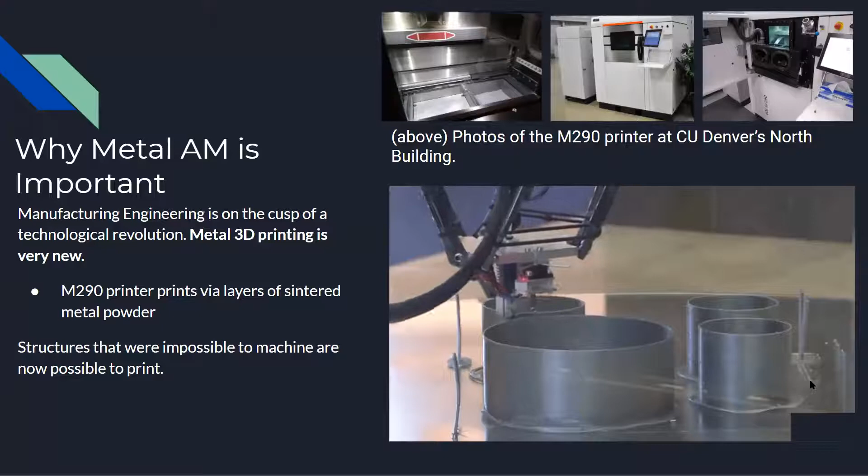Our project had three main goals. Our first goal was to design a part using additive manufacturing techniques, which can then be compared to a conventionally manufactured part. Our second goal was to perform material testing. Of particular interest was fatigue testing on coupons which have not been surface finished. Our third goal was to develop a method to detect errors which occur during the recoating phase of printing.

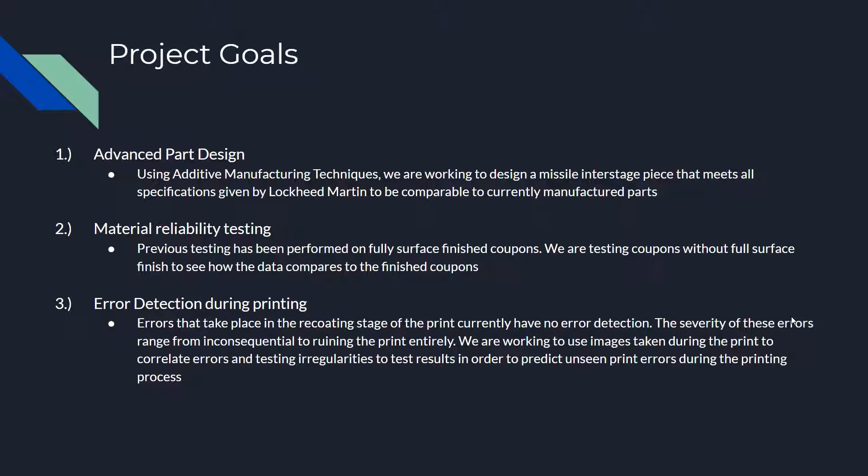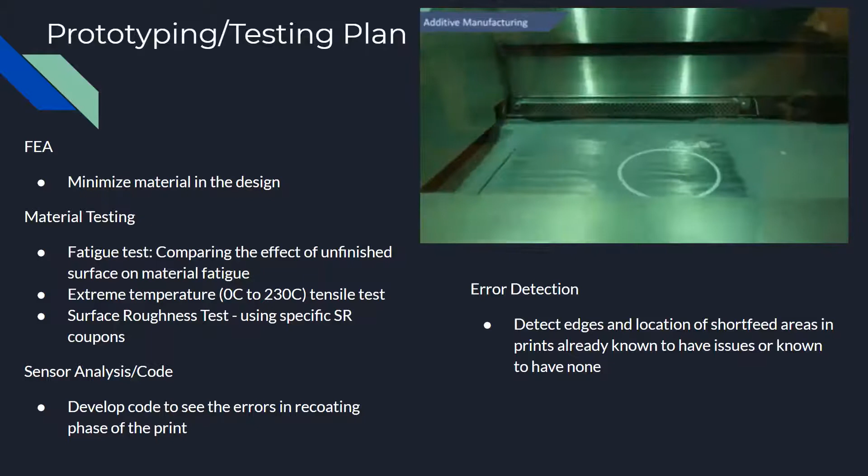Next slide, please. For prototyping, we utilized finite element analysis to minimize the amount of material in the design. For testing, we tested fatigue strength of unfinished coupons, tensile strength at high and low temperatures, and surface roughness. We also developed code to detect errors in the recoating phase of the print. Next slide, please. So, material testing. Next slide.

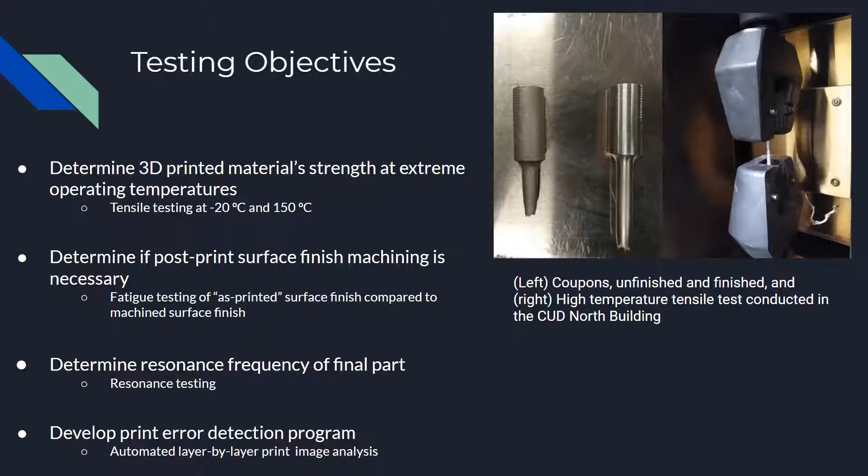So given our design requirements, we determined that we had four main testing objectives. One, to determine if the 3D printed aluminum meets the strength requirements throughout the anticipated operating temperatures. Two, to determine if surface finish machining is necessary in order to preserve part integrity. Three, to determine the natural resonance frequency of the final part, whether it's greater than 20 Hertz. And finally, to develop an automated print error detection program to determine whether printed parts have any hidden errors without having to perform destructive testing. Next slide.

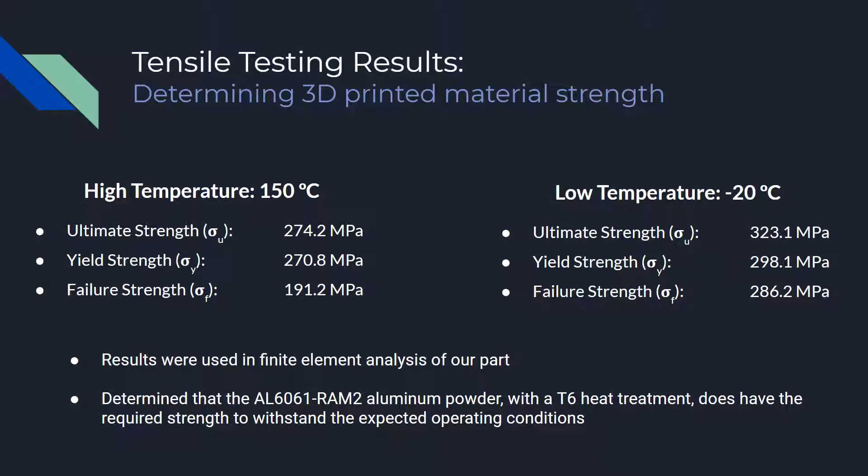We performed extensive tensile testing at 150 degrees Celsius and negative 20 degrees Celsius to simulate the potential environmental conditions these parts would be operating in. We did this in order to determine the ultimate strength, yield strength, and failure strength of the printed parts at these extreme temperatures. These results were then used in the finite element analysis of our part to determine if the parts themselves would withstand these extreme temperatures without failing. We were able to conclusively determine that the final iteration of our part will withstand the forces it will be exposed to over the wide range of environmental temperatures it's expected to operate in. Next slide.

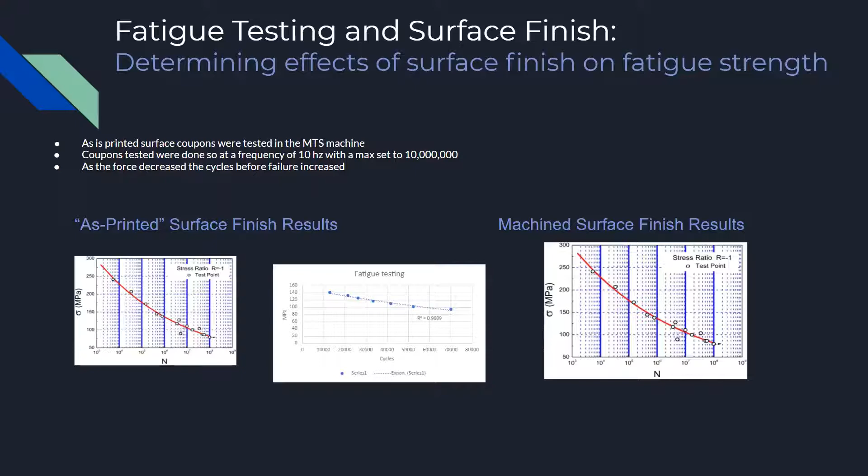As-printed surface coupons were tested on an MTS machine, and the frequency of the machine was set to 10 Hertz. In testing the aluminum 6061 coupons, tests showed that as the ultimate stress decreased, the cycles increased. Tests were decreased at a rate of 5% UTS per test, and results fell within a reasonable curve similar to non-3D printed manufactured aluminum. Next slide, please.

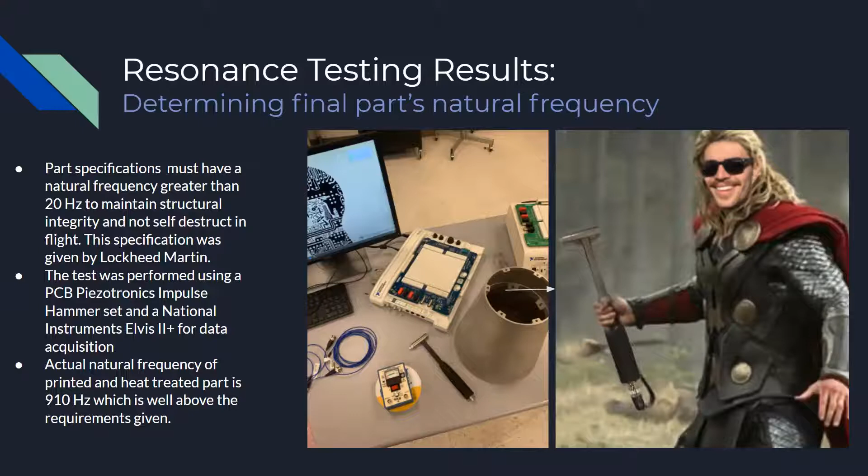Then a resonance test was done to determine the frequency of the part. A specification of 20 Hertz was given to us by Lockheed Martin to ensure the part would not vibrate apart. The test was performed using a PCB Piezotronics impulse hammer connected to an NI ELVIS 2 board for the data acquisition. The part was then hit with the hammer, the frequency of the part was recorded, and data was compiled. The average resonating frequency through the part was around 910 Hertz, which is well above the given requirements.

Next slide, please. The next major goal of our project was to explore the possibilities of non-destructive print error detection. Next slide, please. The printer has two printing stages. It lays out a new layer of aluminum powder evenly as the material for the next layer of the print. It then exposes the desired area with a high-powered laser to melt the powder and then adds the next layer. The printer is extremely accurate when it comes to the laser exposure, so very few of the print errors or print failures occur in that stage. The recoating, on the other hand, has led to aborted prints and a few cases of part failure.

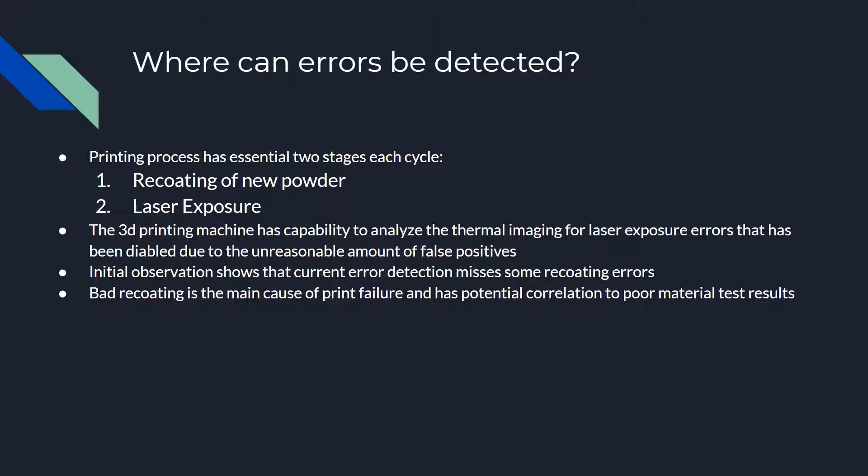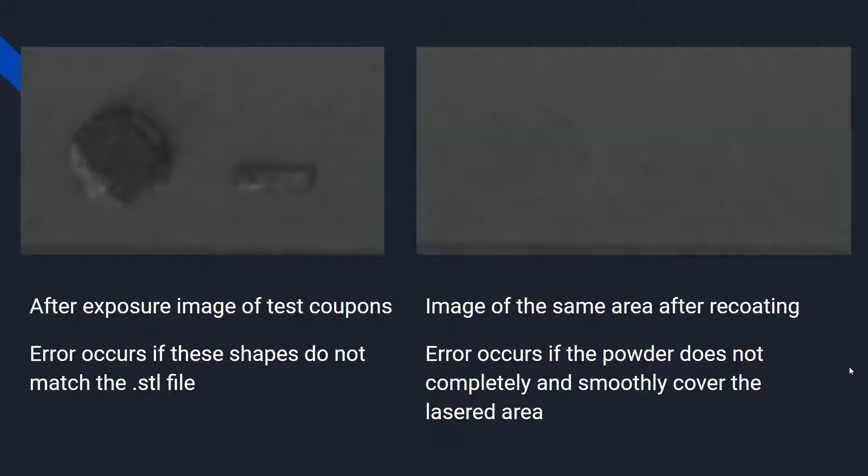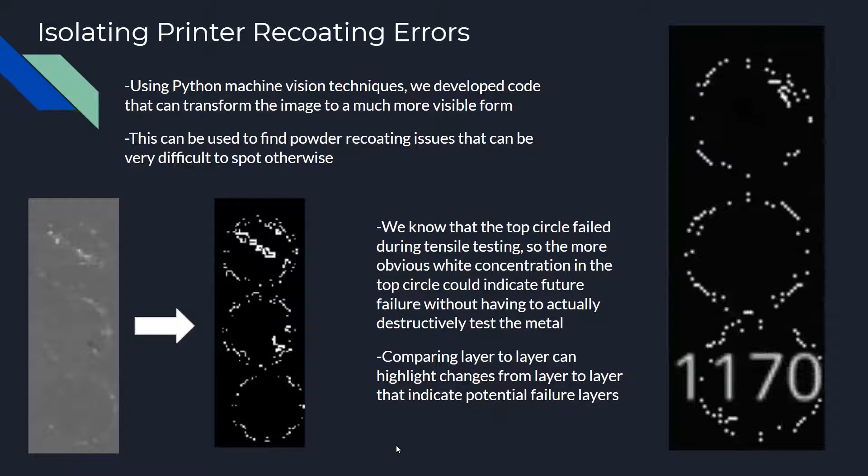Next slide, please. We decided to develop Python scripts that can clean up the images taken of the powder bed from the built-in camera and detect when the recoating is not uniform and likely to cause errors. Next slide, please. The additive team at Lockheed directed us to this print where the top test coupon failed a material test due to recoating. We took these images shown here and developed some custom code using machine vision techniques that filters and reshapes the original powder bed image to one that makes the irregularities in the top coupon much more visible. Next slide, please.

So now that we knew that we could detect some recoating errors, we needed to find out how to test the limits of the printer and the built-in camera. So first we designed some more custom code that takes the after-laser-exposure images and transforms them into images very similar to ones produced by a slice of the original input CAD files. This allows us to see exactly where the parts are for our error detection.

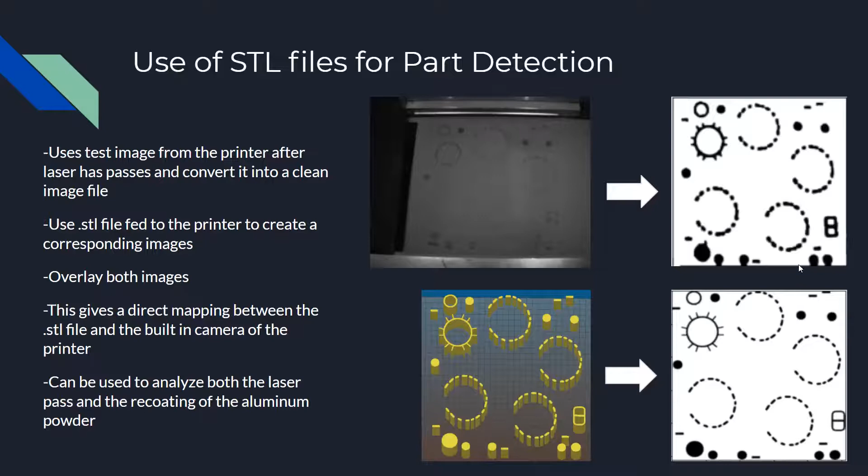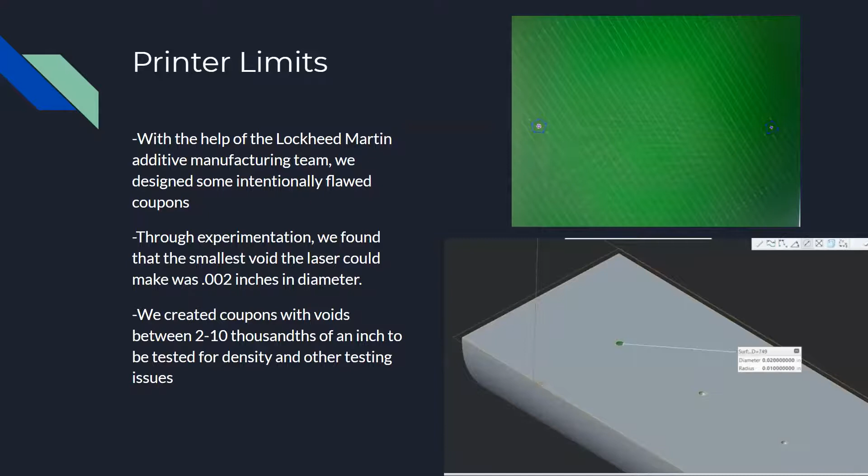We then needed to test the printer limits to see what intentional errors we could later introduce to see what errors we could detect. So we found that the printer has a minimum size of 0.002 inches in diameter to print, and the camera, using our mapping, has about 0.01 inch per pixel, allowing us to know exactly how large of an error we can detect.

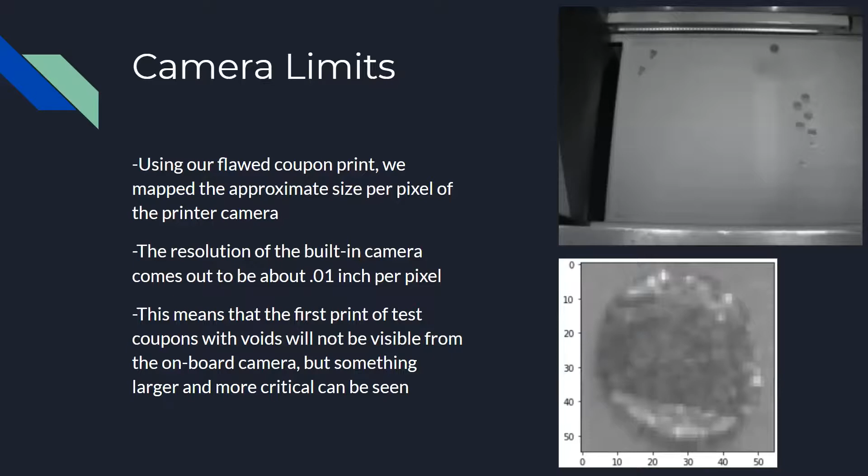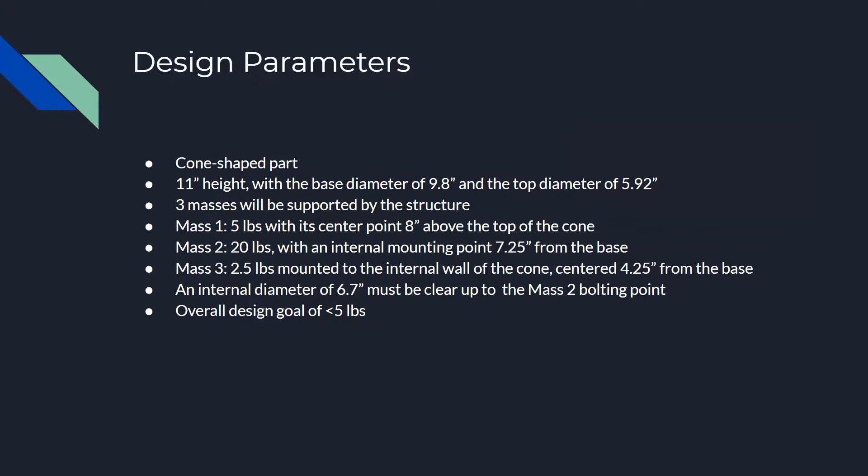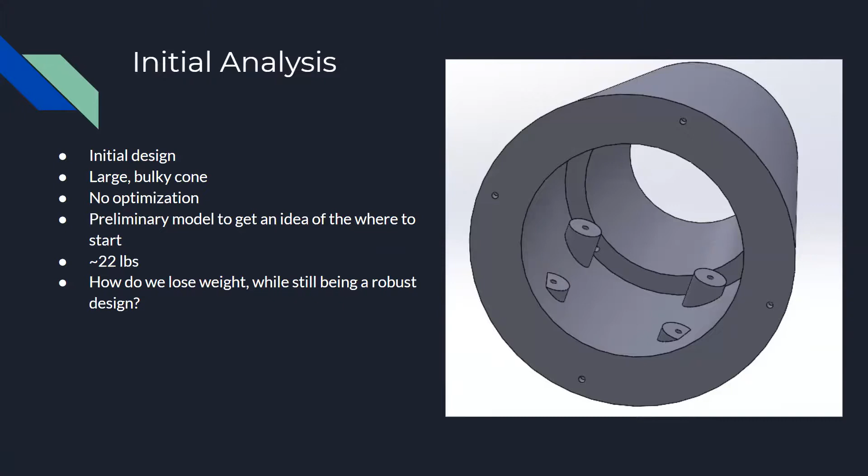All right, here's a quick snapshot of the part itself and how we designed it to the specifications given to us. Next slide. From here, we have a basic height, overall diameter, structure masses, as well as weight that we must stay within. Next slide. We started off with a simple SolidWorks design, pretty bulky, pretty thick cone shape, with all the given masses and internal parts and pieces. It started at about 22 pounds. Next slide. From here, we kept scaling it down, removing material, getting it thinner and thinner to the point where it got lighter and lighter. It got to about 6 pounds.

Next slide. From here, we were able to get a very lightweight prototype version to about 4.3 pounds overall. We had a couple redesigns from the prototype phase to get it to where it should be when it comes to strength and our overall factor of safety. But overall, our part printed successfully, and it actually turned out really well. And that's it. Next slide.